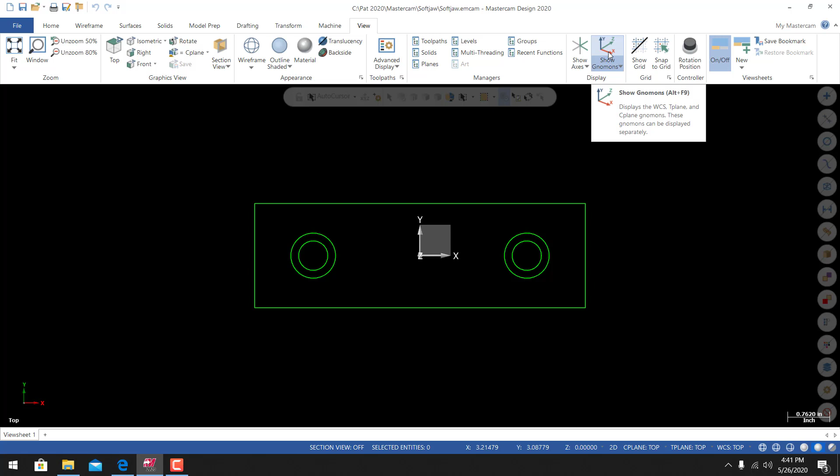Before I create the levels, I'm going to come up to the View tab and turn the gnomons off. I'll select the Show Gnomons icon, and that'll toggle off the visibility of the coordinate system.

From here, I'm going to activate my level manager. So I went to View, and in the Managers field I selected Levels, which brings up the level manager.

I'm going to create 6 levels. Level 1, I'm going to name it Solid Support Geometry.

To create a second level, I'll select the plus sign to add a new level, left click on it, then double click in the name field and enter the new name. This will be called Solid Model.

To create a third level, I'll select the plus sign again. To name it, I'll double click in the name field. I'll call this Wireframe from Solid.

I'll create a fourth level. Click the plus sign, double click in the name field. We'll call this Dimensions.

To create a fifth level, select the plus sign, double click in the name field, and I'll call this Points. For the sixth level, I'll call this Material.

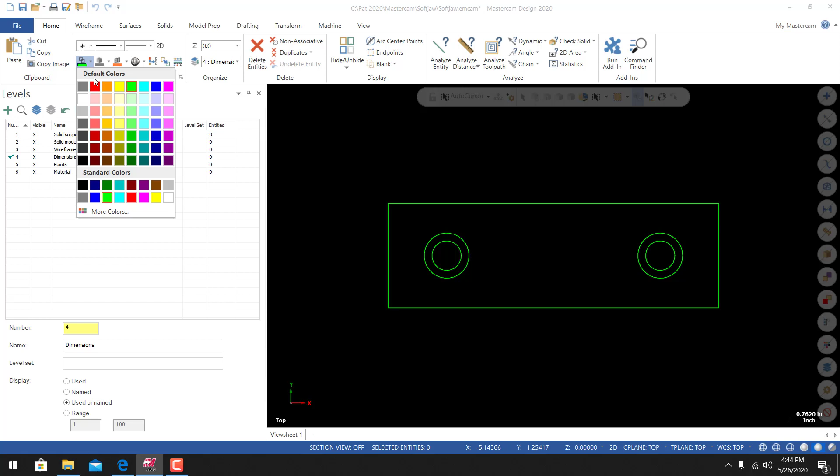I'm going to go to the Home tab and select the wireframe geometry color to red. I want some contrast between my dimensions and my solid support geometry, so I'm changing the color of the dimensions to red.

I'm going to use the drafting tool and dimension the part like I see it on the blueprint. I've got a 6-inch overall length, 1.88 height, some dimensions positioning the drilled and counterbored holes, and a callout for the drilled and counterbored hole. I'm not concerned about the dimensions looking exactly like the blueprint — I'm just using the drafting tools in Mastercam to verify that my geometry is correct.

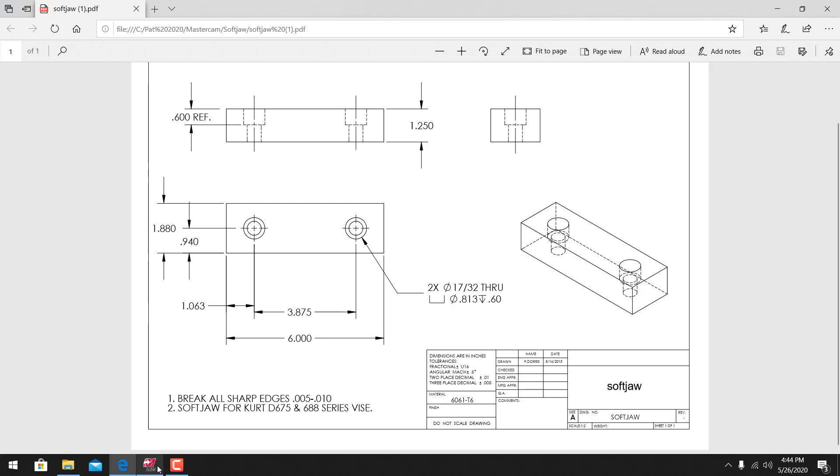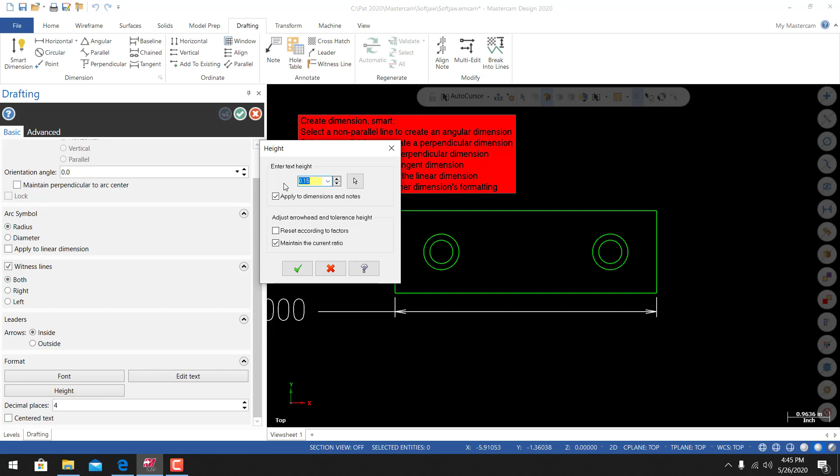So I'll go to Drafting, using the Smart Dimension tool. I'll select the bottom horizontal line to dimension the overall length. I can see the text is a little large, so I'll come over to the parameters for the dimension and set the height of the dimensions to 0.15, then set the number of decimal places to 3.

I'll place the 6-inch dimension off of the part. I'll then select the left vertical line and pull the dimension off of the part.

To dimension the position of this hole, I'll start by selecting the left vertical line, then select the center of the hole, and place the dimension off of the part.

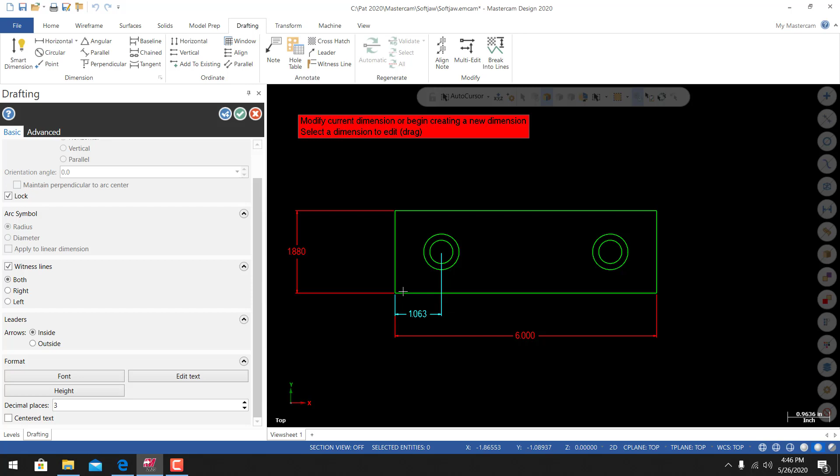To dimension it along the y-axis, I'll select the bottom horizontal line, then select the center of the hole again, and pull this dimension off of the part.

For the spacing from center to center, I'll select the center of this hole, and then the center of this hole.

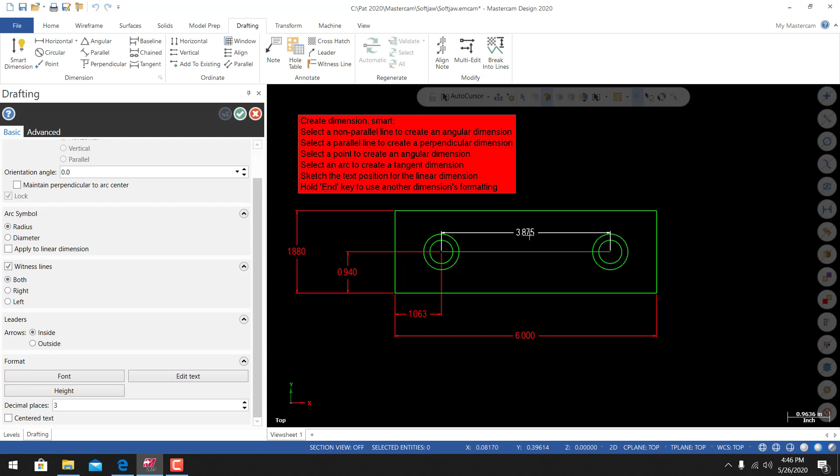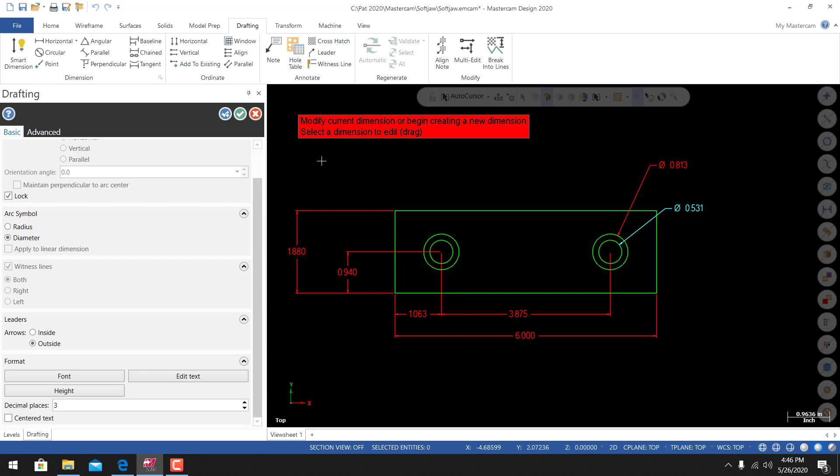I can pull the dimension down here, 3.875. And then the last two dimensions that I'll check with are the diameter of the counterbored hole and the diameter of the hole that's going through the part. Everything looks correct.

I'll exit the drafting tool. I can now move forward and create my solid model. I'll make the solid model level the active level, and I'll make the dimensions level invisible.

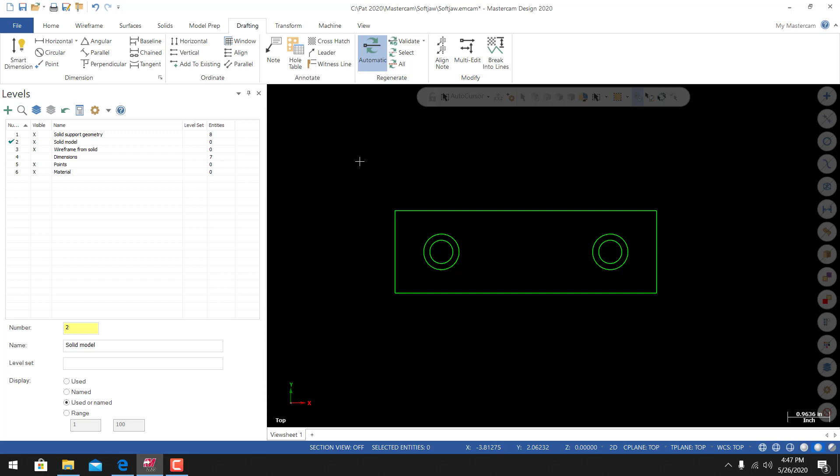When I start giving a two-dimensional sketch depth in the Z, I like to look at it from an isometric view. So right click on your screen and from the flyout menu select isometric. I can roll my scroll wheel to zoom out a little bit.

I'm going to start by extruding the outside rectangle a distance of 1.25 in the negative Z. To do that, I'll go to the Solids tab and use the Extrude tool.

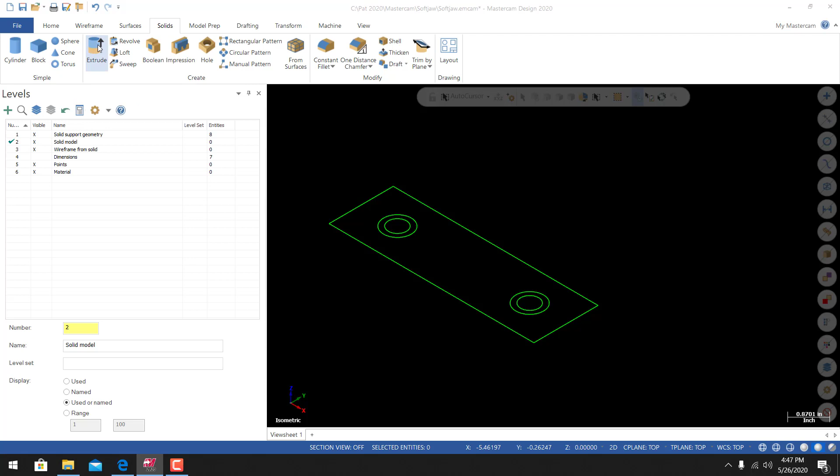The chaining dialog box appears. Select one of the entities that represents the outside profile of the part. I'll select this line here. All connected entities become selected. From here I'll select OK.

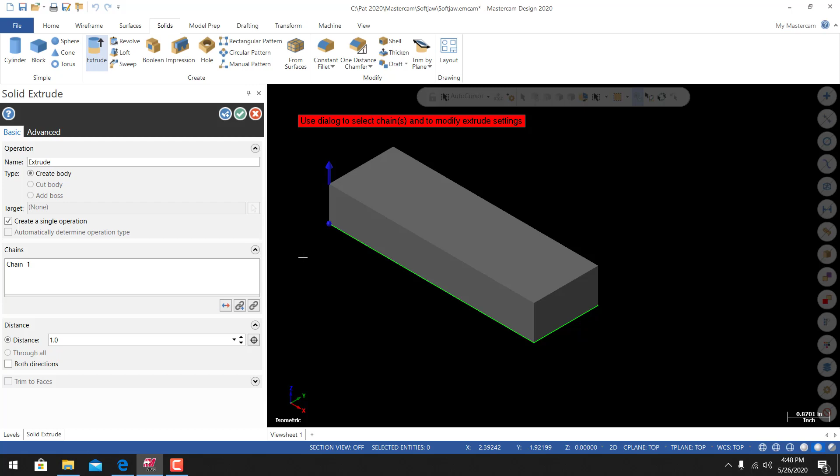We'll see the default extrusion length and direction. The default direction is positive Z. I would like to keep my 2D geometry on the top of the part, so I'll change the direction, and I would also like to set the distance to 1.25. Select Enter, and you see the preview on your screen. At this point, I'm done with the Extrude tool. I'll select OK.

I'm now going to use the Hole tool underneath the Solids tab to create the drilled and counterbored holes. I'll select the hole icon. I'll come down to this field here. For the type, I'm going to set it to counterbore.

For the diameter, click in the diameter field, 17 divided by 32. I'll select Enter. The counterbore diameter, if I reference the blueprint again, is going to be 0.813 by 0.6 deep. So for the counterbore diameter, 0.813, Enter. Then for the depth, 0.6, Enter.

For the depth, I want the drilled hole to go all the way through the part, so I'm going to select Through All.

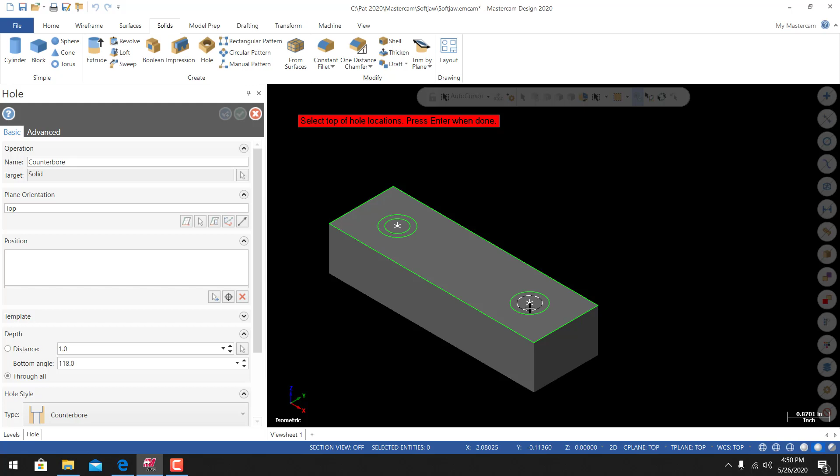I'll position my cursor in the graphics area, and I'm going to let my cursor lock onto one of the circles. Left click, you see a center point appear. Then I'll come over to one of these circles and left click. You'll see another center point appear. Once I hit Enter, you'll see those two positions appear in this field.

In the graphics area, if I tumble my view, you can see the drilled and counterbored holes. From here, I'll select OK. I'll save my work again.

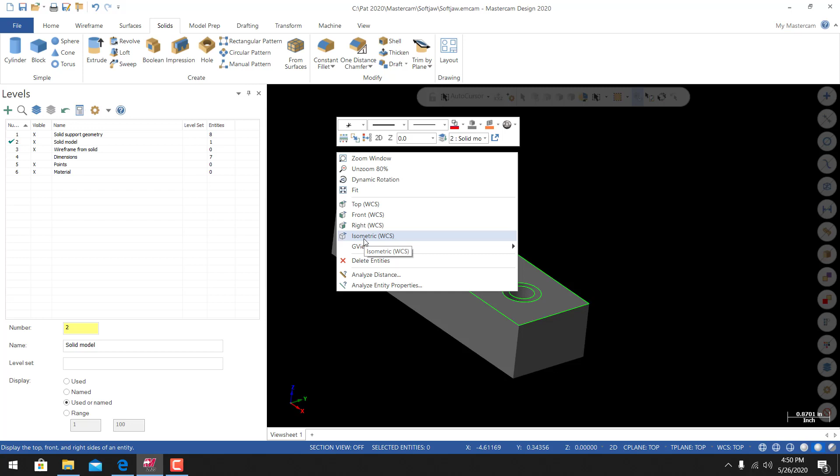I'll look at it from an isometric view, so I right click on my screen, select isometric. At this point, I'm going to turn the solid support geometry level off. I'm going to make the wireframe from solid level the active level, so I'll select next to the number for level 3. You'll see the check appear indicating that it is the active level.

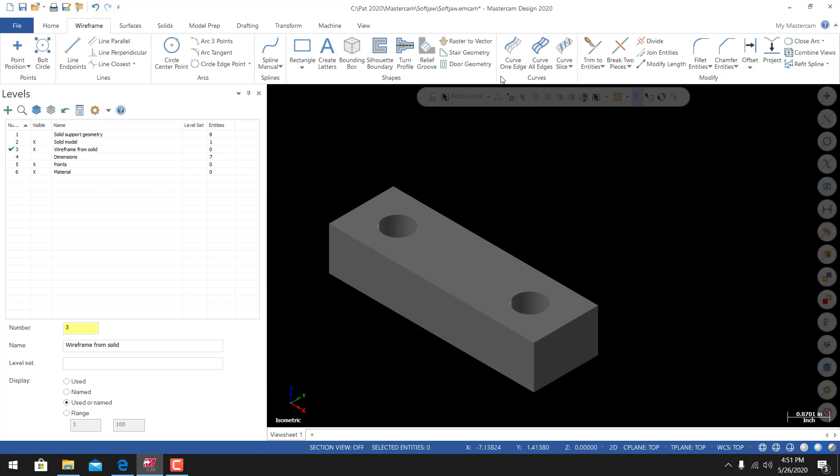Once again, I'm going to change the wireframe color. I'll change it to this color here. And I'm going to use a tool, Create Curve All Edges. You'll find it underneath the wireframe tab, and then in the curves region, curve all edges. Select the curve all edges.

We're being prompted to select what we want to make the curves on. I'm going to triple click the solid body. The entire part becomes selected, and then I'll select OK. Make sure you're set to a 3D construction plane, and you should see wireframe geometry being created on all edges of the part. I'll select OK to exit the tool.

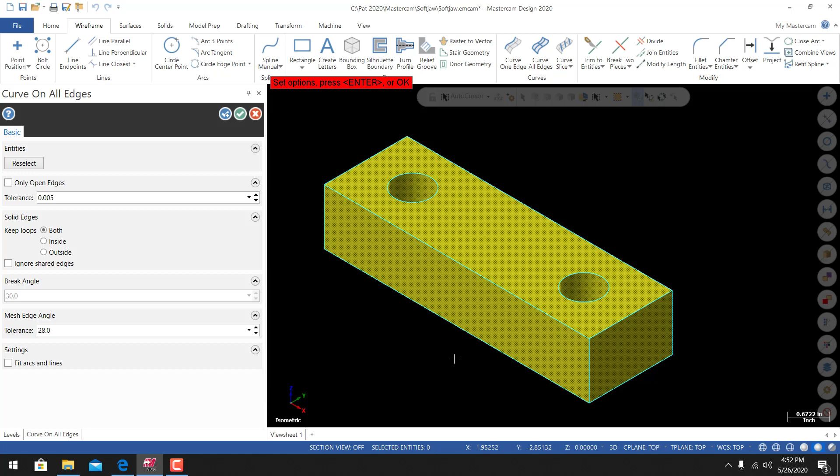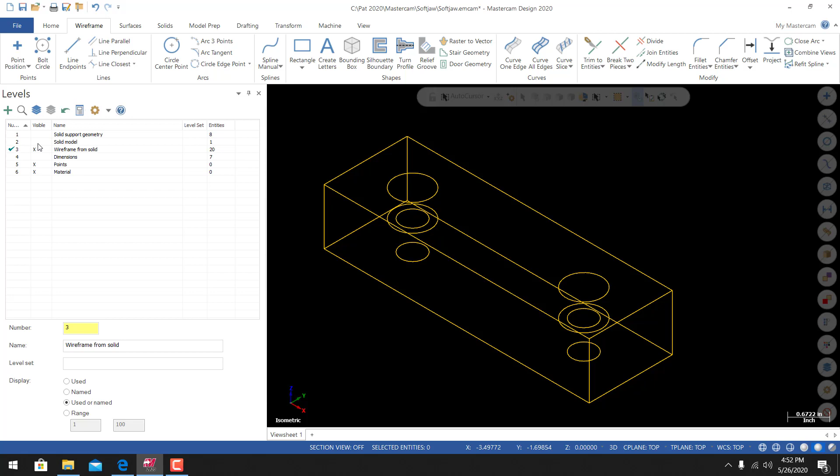If I turn the solid model level to invisible, you can now see that I have a 3D representation of my part built from wireframe geometry. Right click Isometric. I'll make the solid model level visible again. I'll save my work.

We are now ready to select a machine definition.